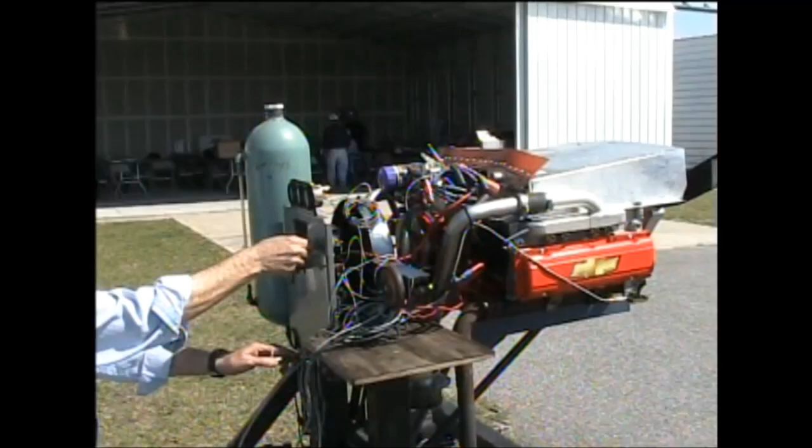And welcome back to Building Your Affordaplane. We've finally reached the moment where we're ready to start building our wings. And right behind me is the best part of all.

Our friend Steve, who we've met various times throughout this series, has created a fixture or jig for making the wings super easy to put together and to keep them all straight and level and in line and to know where all the parts and pieces go.

So we're going to take a moment describing what it takes to put together this fixture. And the best part is that it uses your existing workbench. You don't have to build a new workbench, no sawhorses, nothing like that. So let's get started and talk about how to set up this wing fixture, thanks to Steve.

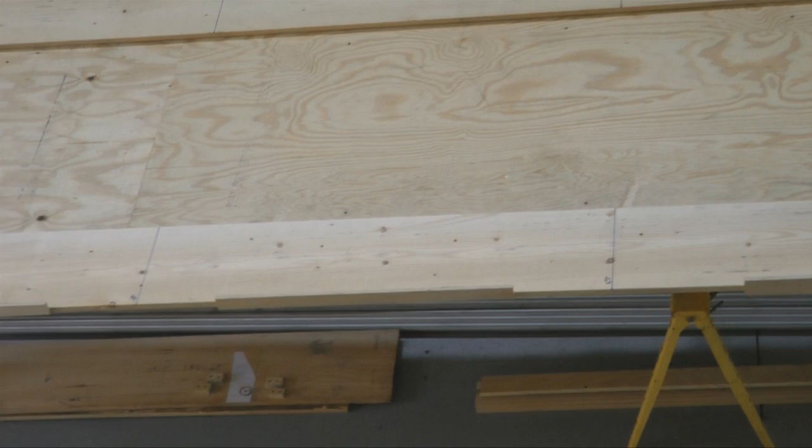Anyhow, you clean off 12 feet of your workbench, which of course is 4 feet wide, and you need to add 2 strips of wood 12 feet long. Now, I happen to have 12-foot pine boards. You can use plywood. Now, obviously, plywood doesn't come in 12-foot lengths, so you would butt an 8-foot piece up to a 4-foot piece, and that would work perfectly fine. And of course, we need 2 of these.

How wide do they have to be? Approximately 6 inches at minimum. Mine were 11 inches, but that's just because that's what I had on hand. So at least 6 inches wide, 12 feet long, 1 for each side of the table. As you can imagine, this is going to become the outer limits, the outer boundaries of the front and rear spar. And let's go a little bit closer and take a look at how these are configured.

Looking down the length of the table, we notice that it overhangs by about 3 inches. Not exactly, but very close to 3 inches on each side. And that's why I recommended a minimum of 6 inches, because you want enough space to tack it down to the edge of the table. If it's wider, that's even nicer. And along the edge, occasionally, we have some strips that we tacked on the edge, and this is to keep the spar from rolling off the edge.

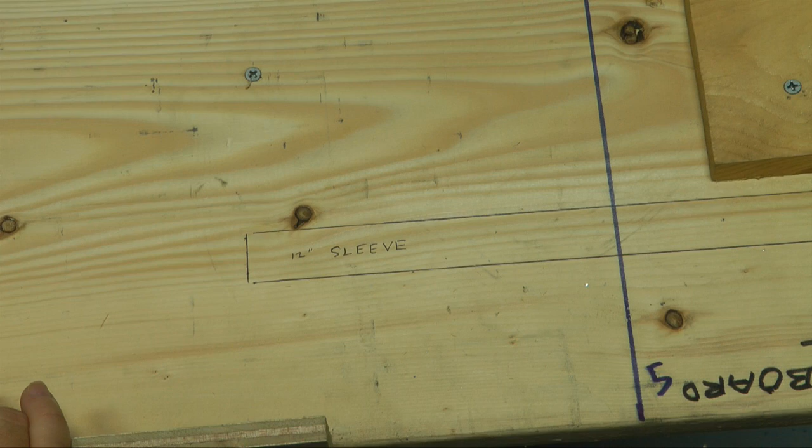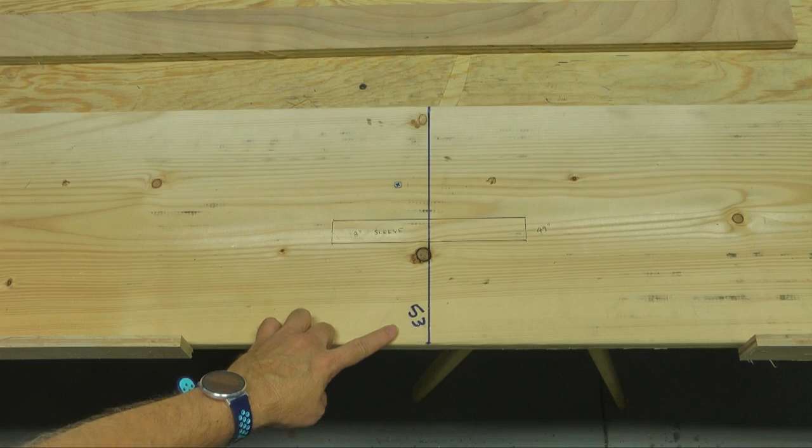But before we slide that sleeve in, we have another one further down. Let's go take a look at that. Here's our station at 53 inches. You will notice that we have an 8-inch sleeve, and that is marked here. So we're going to first slide down an 8-inch sleeve and stop it right here. I've written down 49 inches, because as we push this sleeve into the spar, we want it to stop at the 49-inch mark. Because half of 8 inches is 4, 4 and 49 is 53.

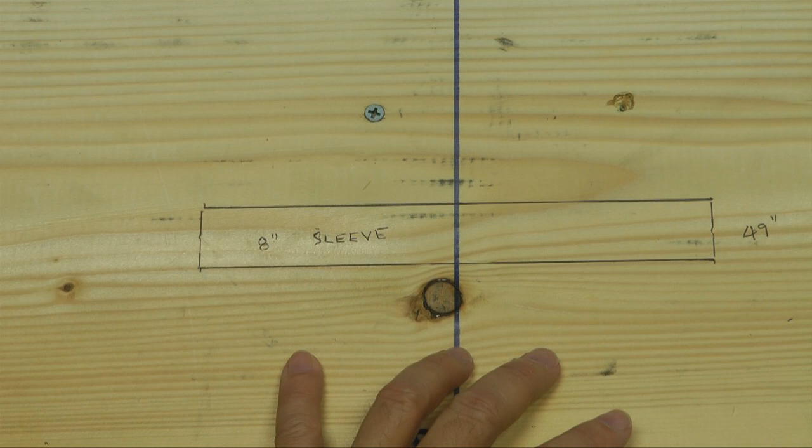So after we put this sleeve in, then we'll put the first 12-inch sleeve at the end. Now we have one more sleeve which we'll put in from the other end. We'll slide it in from this end. Let's take a look at that. And our last sleeve is at the station 101, 101 inches from the inboard end. And that is going to be another 12-incher. And it's going to go right here. But since this end is much closer to our other end, we'll slide it in this way and stop it at 37 inches from the other end. And it will sit right here.

Now these sleeves go into all of the spars, the 2-inch spar and the 1.5-inch spar at the other side. And of course we have to do this for both wings. These inner sleeves, of course, strengthen the spar. And notice that each of these sleeves were centered on our stations, and that's because these stations are going to be where we have cross members attaching, and so that will thicken the wall for the hardware and make it stronger in those areas. So as we prepare the spars, these will remind us that we need to first insert those sleeves at these very specific locations before we continue.

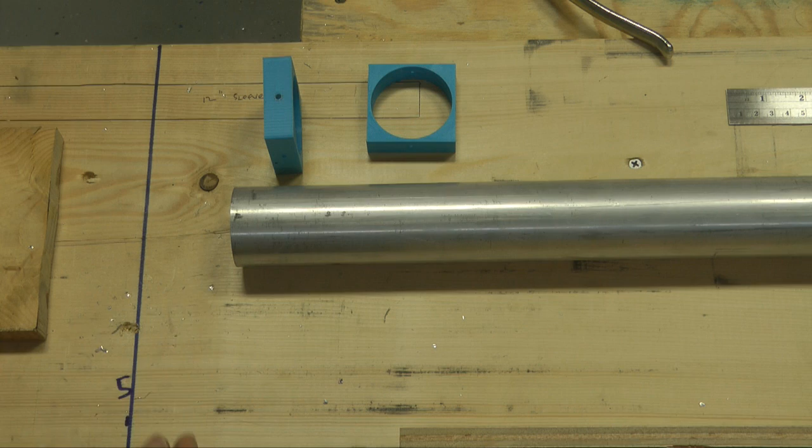So let's get started with our wing. We'll do one wing at a time. Now we need 2 spars, the 2-inch and the 1.5. And what we're about to show here needs to be performed on both spars. The first step is to measure 5 inches from one of the ends and drill an 1/8-inch hole. Small hole like that.

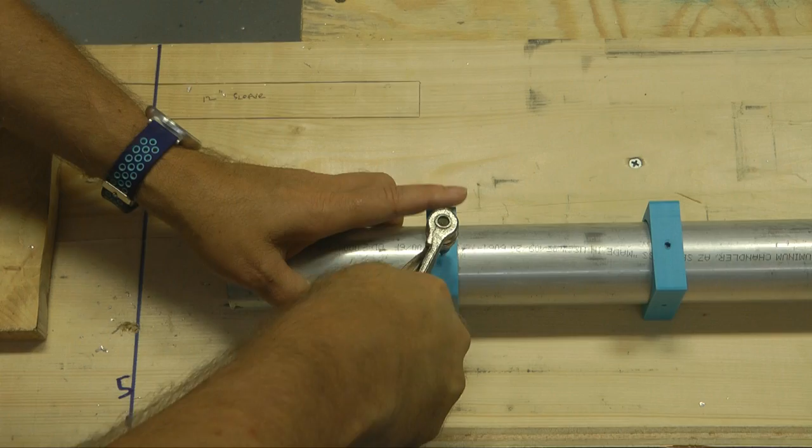Then slide on a couple of your centering blocks, the ones for 2 inches. Slide on one here. We'll slide on one here. And then put a cleco through into the hole you just made. That. And what that does is lock it down so that the spar cannot rotate anymore.

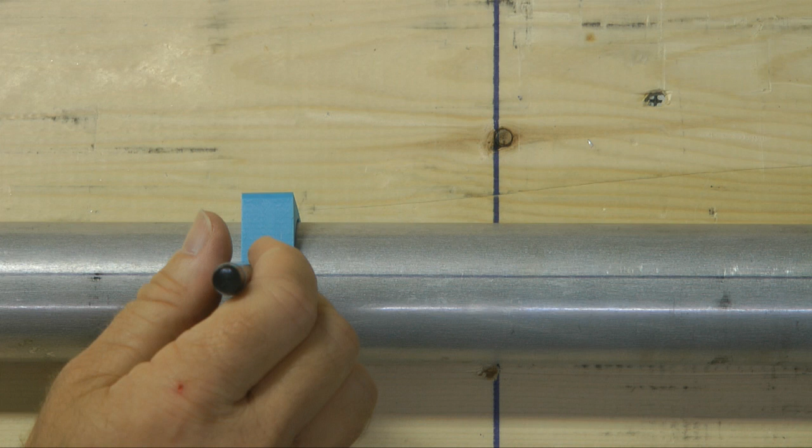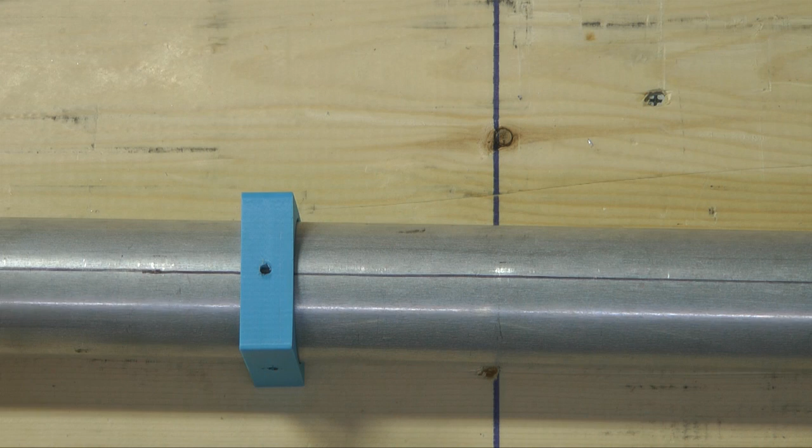Now what we're going to do is use this block and another one if you so desire and create a line all the way down. In fact, I'm going to go start at the other end. Let's take a look. Now you can see the center line, probably a little hard to see, but basically by holding your pen in the middle and just sliding the pipe by. If I had one more hand, I'd hold the pen. And you can make a very nice line down the entire length of the pipe very quickly and very accurately. Now we need one on the other side.

Now we come back to the other end and simply rotate 90 degrees. And what that allows us to do is to use our pen to mark 180 degrees the other side and simply create a line on the other side. So basically we need 2 lines 180 degrees from each other.

The line really only needs to be made at or around the stations that we drew, the 4 stations. But if you want to draw it the entire length, that's perfectly fine too. So prepare both spars, the 2-inch and the 1.5-inch, both with lines on opposite sides. Those lines are going to come in real handy in a not too distant future.

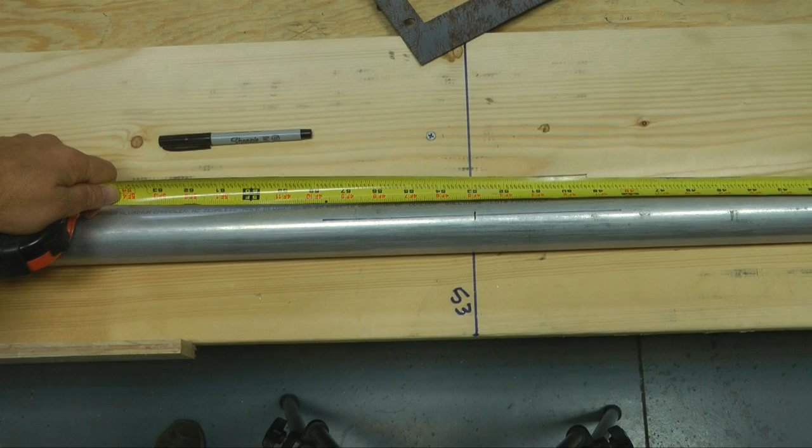Now the next step is to mark all 4 stations. So here's our 53 mark, and you're going to mark that where it crosses your center line on both sides. So flip it around and mark it. And then move down and get all 4 stations, 53, 101, etc.

And after you mark them, one way as a sanity check that you got them in the same spot is to put your little block over, look for the mark, and then spin it around and find the mark in it. So that way you know you got it at the exact same spot on both sides.

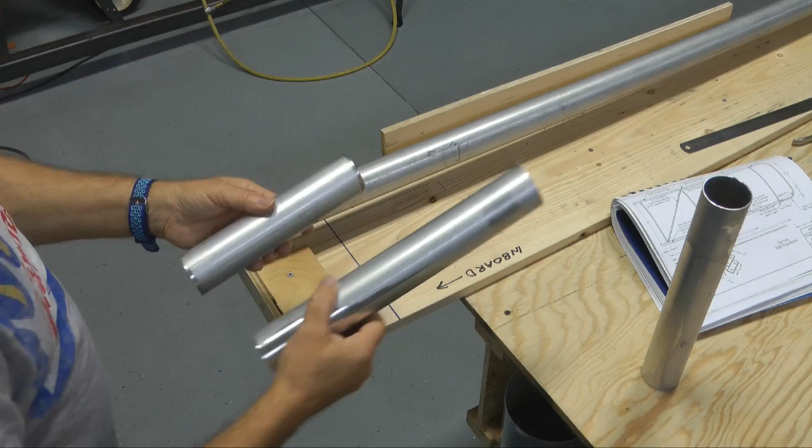Our next step is to insert our sleeves. Now, of course, you got to create these first. Every spar is going to have 3 sleeves. Check your plans. 2 12-inchers and 1 8-inch. These are 1/8 smaller. So in other words, for a 2-inch, this is 1 7/8 inches. And we need to cut it to the proper length. In this case, the first one we're going to insert is 8 inches.

And we want to really check that they are nice and smooth. What you don't want is one of these to be tight, because believe me, they will get stuck and you will never get them out, and that's a bad thing. You're going to end up having to throw away a tube.

So assuming you have deburred and cleaned up the ends, and be careful about using tubing cutters. Tubing cutters do distort the ends and will give you problems with operations like this. So a chop saw, band saw is easier on the edge as far as crushing it, deforming it.

But if you find that they are tight, you're going to need to polish them off, be it with some fine sandpaper, spin it around on a sandpaper belt, polish it, whatever it takes, but you definitely want to make sure it's this simple to go through, this easy to go through. It's very simple.

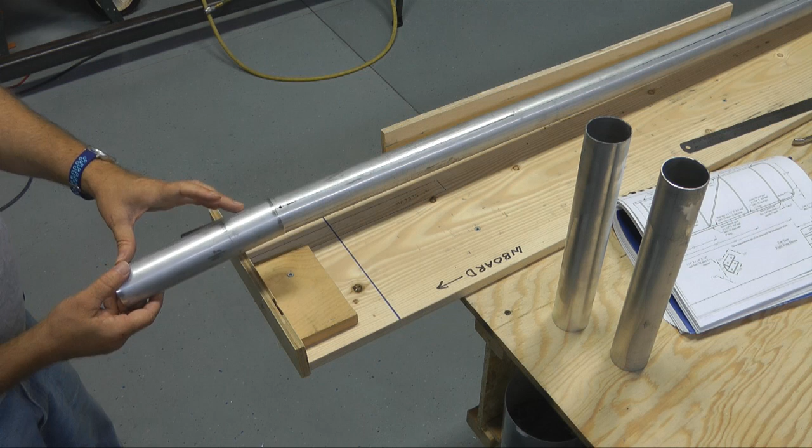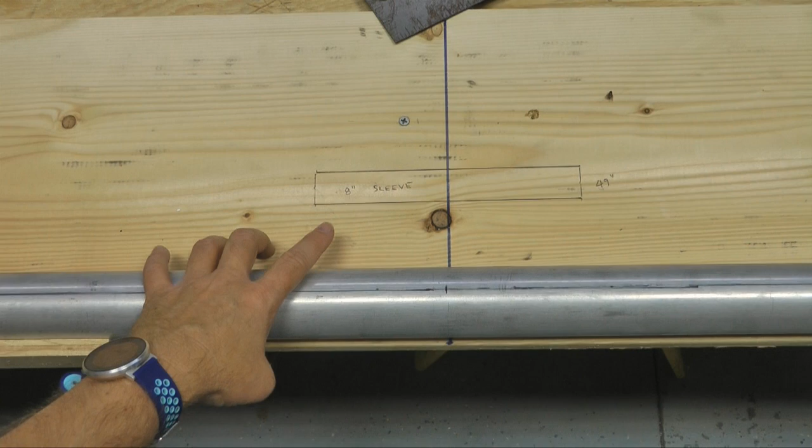Now, how far down does our first sleeve or insert go? Well, if you look at your stations, you will notice that at station 53, we have an 8-inch insert to go down. Let's go review that. Here is our station 53. We have the mark we made, and then remember we labeled this for an 8-inch sleeve. And this is where we want to push the sleeve down until it ends right here. So we'll be pushing it down and stopping it right here.

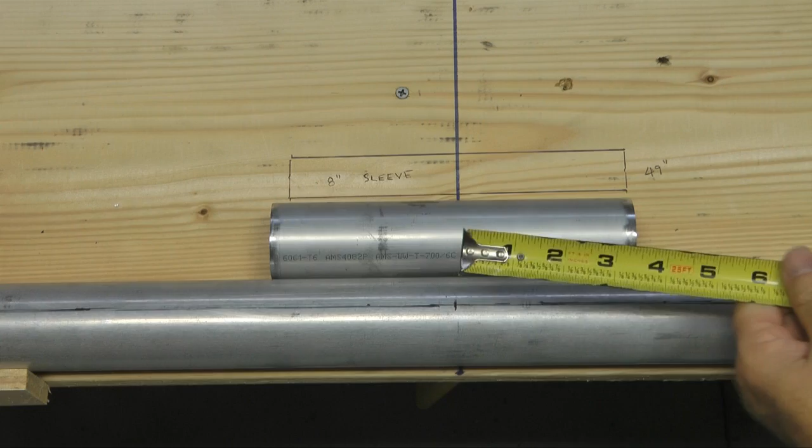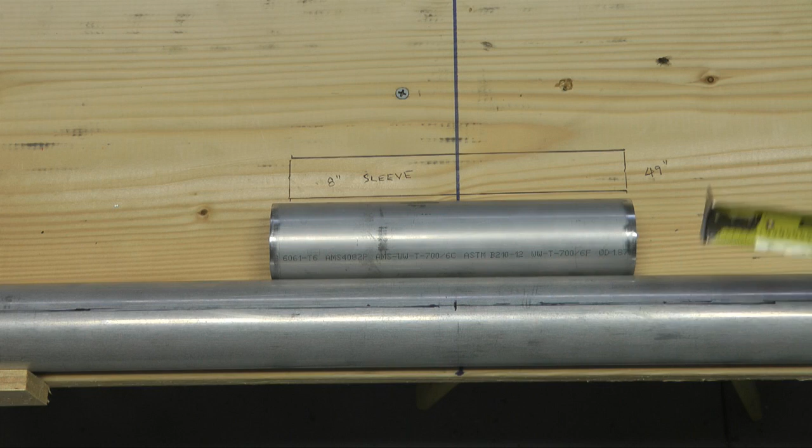Now the critical number is right here, 49 inches. So I am going to use a tape measure to push that sleeve down until I get 49 inches of tape into the pipe, which will stop it right here. So you want to do this carefully. You don't want to push it too fast, otherwise you have to go to the other end and push it back if you overshoot the runway, so to speak.

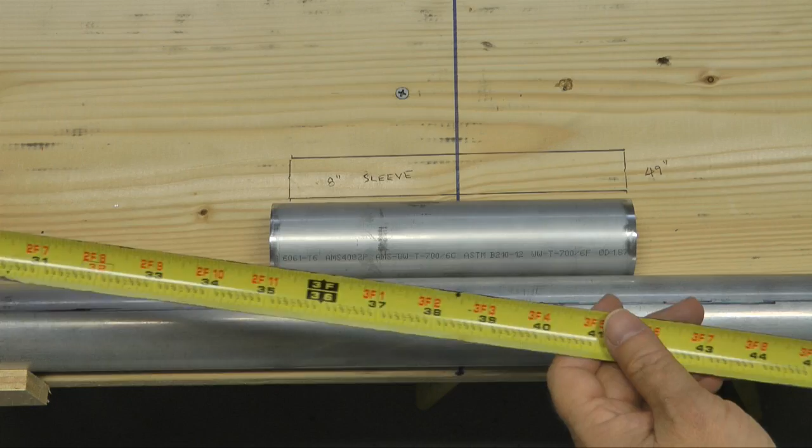So I'm going to start with my 8-inch sleeve in the end and push, push, push. I'm going to catch the lip with my tape measure and stop when I see 49 inches at the very end of the tube. Let's go do that. All right.

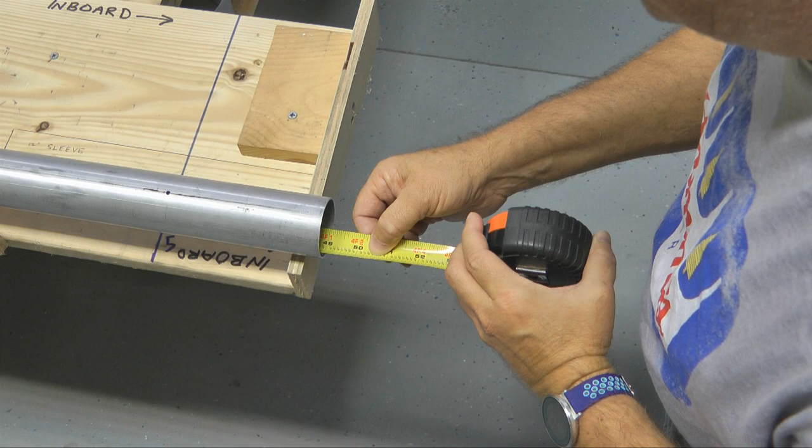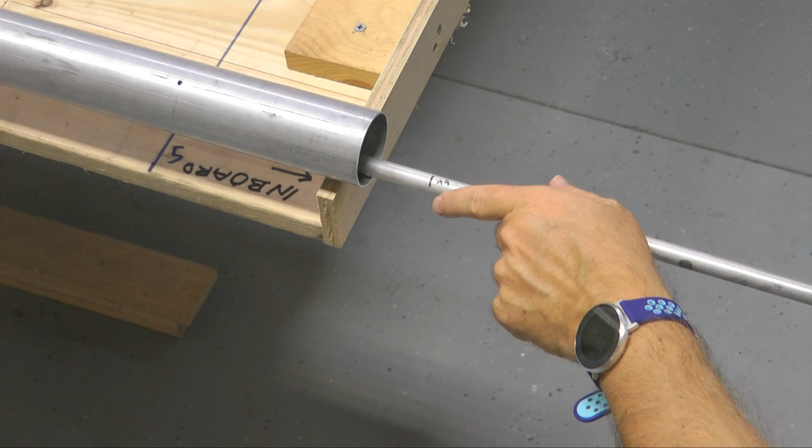Right there. Now I'm going to visually look down there and make sure it went all of the way. Another great way to push it is with one of your 1/2-inch tubings that you're going to use for ribs later on, and mark 49 inches, and you can definitely feel it when it touches. Or you can push it with this, either way.

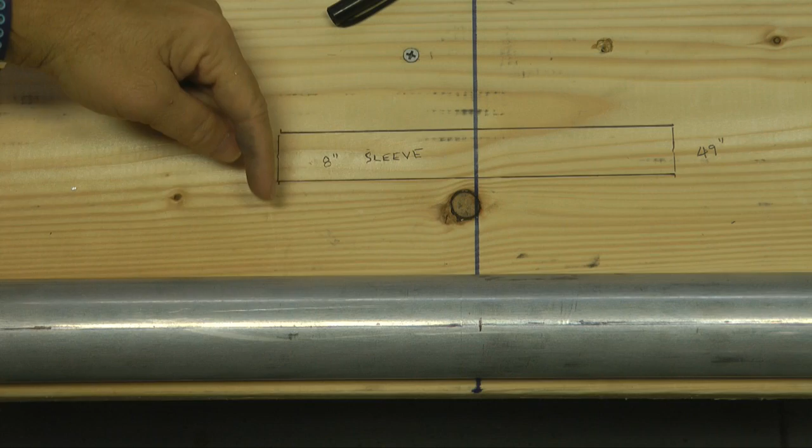Now, once you have it like that, do not shake your tube around anymore. We don't want it shuffling around. We want it to sit at that 49 position. So I'm going to carefully set my tube back in the fixture. Now we know the tube is sitting right in here, and here's our mark.

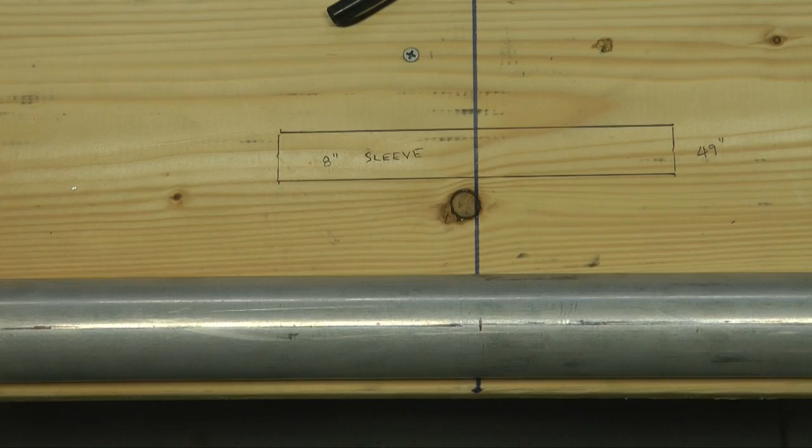I am going to center punch that and then drill a 1/8 inch hole and insert a cleco. This will prevent that sleeve from moving from this point on. Now that sleeve will not move any longer. Let's move to the left down to station 101.

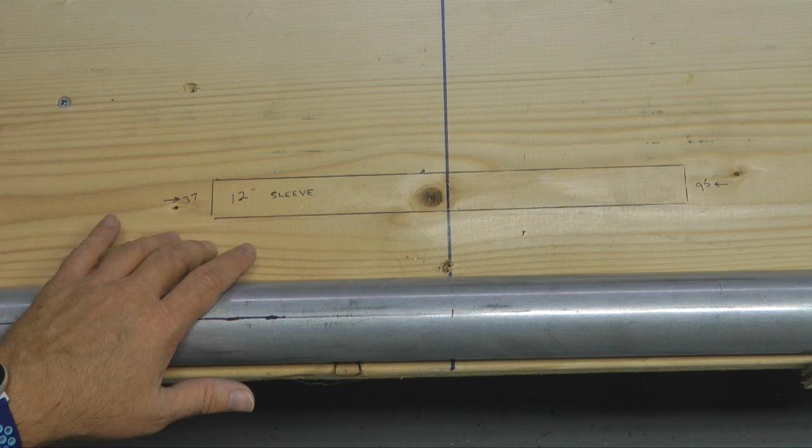And what we're going to find is that we have the need for a 12-incher. Now this one we're going to insert from this end because it's only 37 inches from this other end rather than going all the way from that end. So we're going to perform the same operation, slide a sleeve down to here, then we will punch and drill with the 1/8 inch cleco to hold this one in place.

And here's our 12-incher. Confirm that it moves nice and free, and then send it down 37 inches. And there's the cleco for our 12-incher at station 101. And now we go all the way back down to the root end where our last 12-inch sleeve is to be inserted.

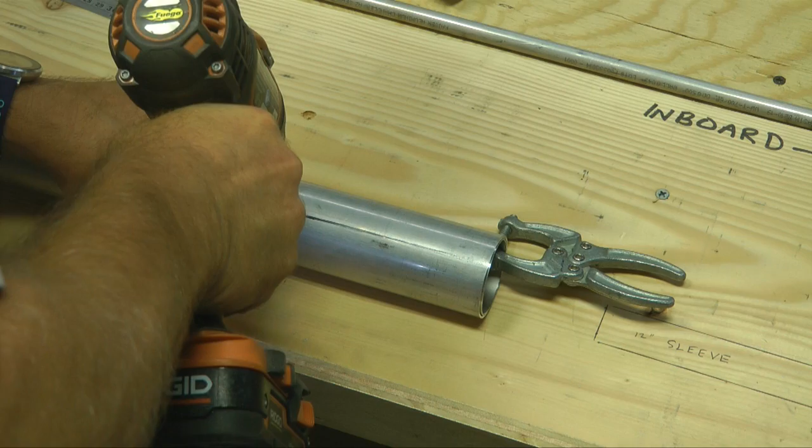And we save the easy one for last. So this will be a 12-incher. And it goes even. And then we drill through our hole that we previously made and cleco. Clamp.

Now, with the clecos still on, you want to turn it upside down so the clecos are pointing down, and then punch and drill the opposite side precisely with an 1/8-inch hole. And you might ask, well, how do you set it down on top of the clecos? They stick out pretty far. We'll take a look.

If you simply drill a 3/4 hole at each station, you will find that it is no problem to be able to invert the spar and set it down inside the hole so that you can drill on the other side.

Now, we should verify that we have 4 holes, one at each station, including the one at the very end. One 1/8-inch hole at each station on both sides. And our bottom side right now has the clecos in it to keep our sleeves from moving. Our next step is to open up all of these 4 holes to 3/16 of an inch, and then open them up to 1/4 inch.

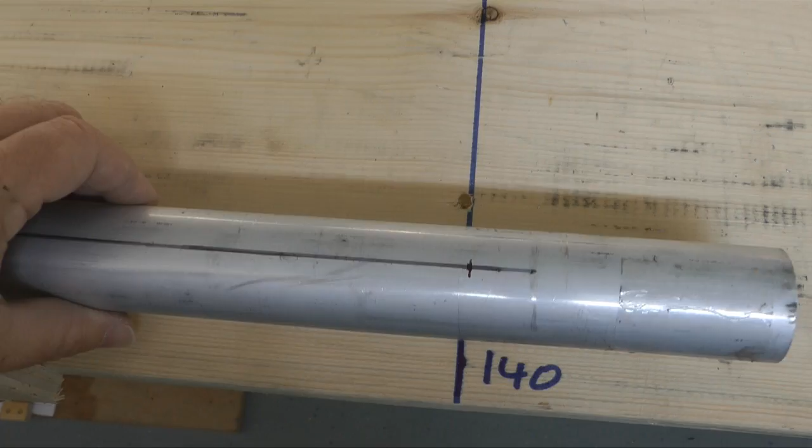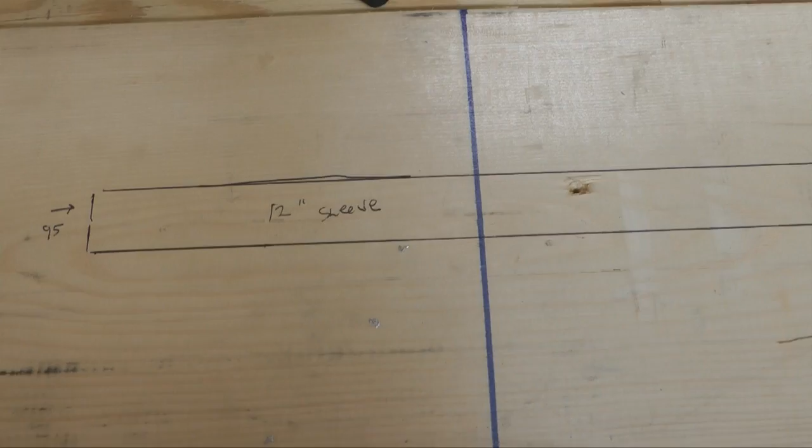Then our next step is to take our inserts, and then follow the same principle. We have an 8-inch here, and then at station number 101 we have a 12-inch, and then finally at the very beginning we have a 12-inch that goes in here.